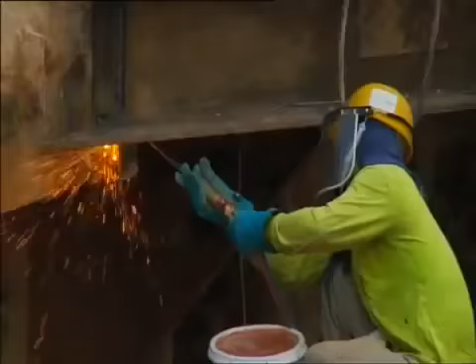Singapore's Marina Bay Sands is one of the world's most complicated construction projects. Engineers have to build not one, but three skyscrapers that will shoulder a sky park as big as an aircraft carrier. Worst case scenario, we get stuck. They have to devise ingenious solutions to assemble a 60-metre tall museum of impractical dimensions, install giant artworks, and erect seemingly floating pavilions for shopping and entertainment. If engineers succeed, they will create a virtual city unto itself.

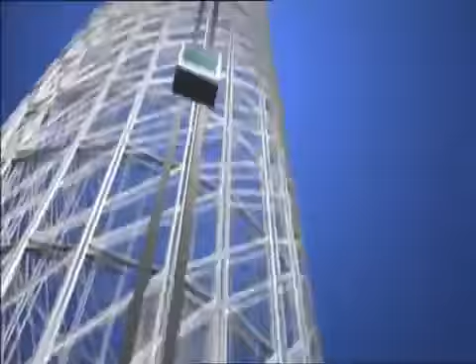Singapore, the Southeast Asian country, is smaller than New York City. The lack of space forces it to build its largest leisure and entertainment hub to date on a small tract of reclaimed waterfront land. The Marina Bay Sands: it's not one megastructure, but many.

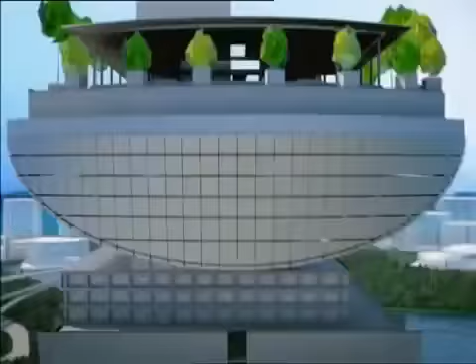Serious challenges lie in the array of buildings that form the unique complex. Three 57-story hotel towers slope at such great angles, they're in danger of buckling under their own weight. An even bigger problem is the hotel's roof. A 340-metre sky park spans its length, containing gardens, outdoor pools, and the world's largest cantilevered observation deck. But how do you build something as big as an aircraft carrier, 200 meters in the air?

In the hotel's atrium, mammoth works of art have to be somehow incorporated into the architecture. Its challenging centerpiece: a 15-ton mass of steel by a renegade artist from Britain.

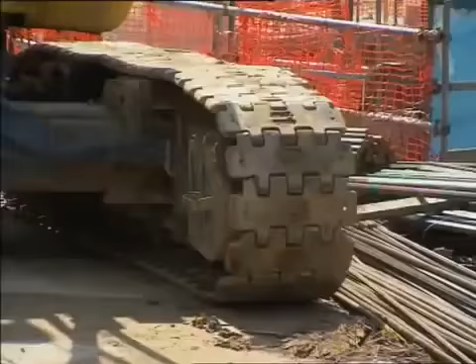A 60-metre tall art science museum is designed for maximum visual impact. It will be to Singapore what the Opera House is to Sydney. Only one problem: it seems too impractical to construct.

And a set of dramatic glass-encased pavilions, while themselves pose little challenge, have to be built in water.

The man behind the Marina Bay project understands the risks, but he believes that anything short of astounding will fail. Sheldon Adelson, one of the world's richest men and CEO of Las Vegas Sands Corporation: 'What we hope to accomplish is to change the face of Singapore tourism. So we expect a very successful development.'

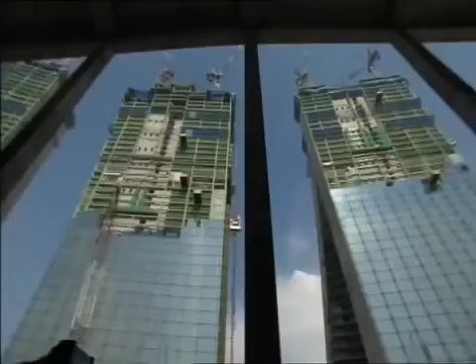'That is by far the largest and most expensive single project we've ever undertaken. It'll cost about 5 to 5.5 billion US dollars. It's a lot of money. Now, I know $1 billion doesn't buy what it used to, but by any measurement, it's a lot of money today.'

Adelson believes his huge investment is safe in the hands of Moshe Safdie, a world-renowned architect. Safdie is recognized for his use of dramatic curves and geometric patterns. The Marina Bay complex will be his largest and most difficult project yet.

'I think that architecture has to be timeless. Therefore, what it espouses, what it provides, needs to be something that has a long life. What's unique about Marina Bay is all the pieces coming together. You can't think about it as individual buildings. You've got to think about it as a piece of city. It's much more a symphony than it is a sonata.'

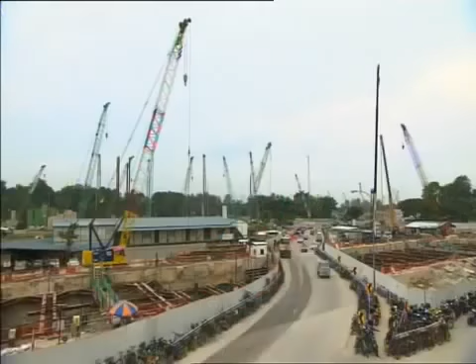On the ground, engineers are more concerned about the reality of building Safdie's vision. This is the North Retail section area. 30-year veteran John Downs is in charge of overseeing the entire project. 'The design is very, very diverse, and each component of the project is totally different from the others.'

'For a project of this size, you'd expect with the planning, with the design, with the construction, you'd be expecting somewhere between 6 to 7 years. Here is basically a 3-year turnaround.'

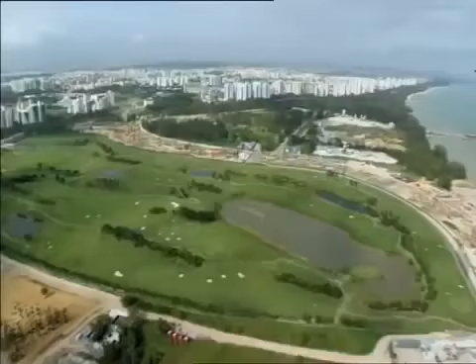The complex sits on 560,000 square meters of reclaimed land, part of a decade-long plan to revamp Marina Bay, a former saltwater estuary that's now a freshwater reservoir.

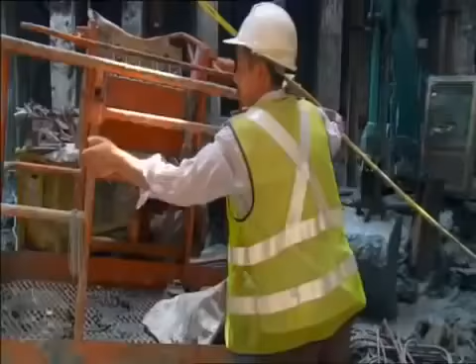Beneath the reclaimed land, which is essentially a seabed, is a dangerous layer of marine clay. Sometimes called black toothpaste, marine clay has very poor structural properties. If not given complete respect, the unstable marine clay is potentially fatal.

In 2004, Singaporeans discovered the lethal consequences firsthand. A routine excavation in an underground tunnel for the mass rapid transit network causes a collapse, creating a gaping hole in the Nicoll Highway, killing 4 workers.

'The ground conditions in which they were building the Nicoll Highway were not dissimilar to those in which we are encountering here. They had also soft clay, they had similar depths of excavation between 20 and 37 meters. One of the big things that was learnt in the Nicoll Highway collapse was the importance of monitoring movements and the control of quality as the construction proceeds.'

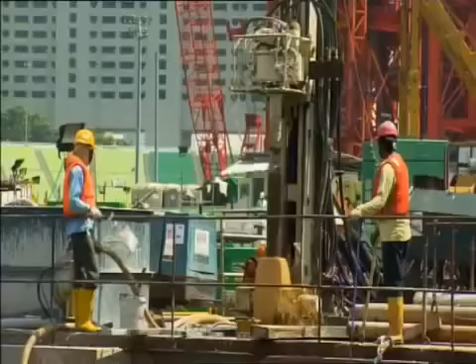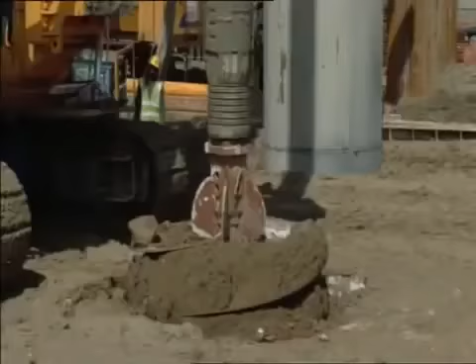Marine clay is an old foe of engineer Mike Barton. He's defeated it in the past by understanding how it behaves. 'The big problem with marine clay is that it is so soft that when you dig out the inside, the walls will move and potentially collapse and allow all the surrounding water in the bay into the excavation.' So, before work can begin, the unstable building site needs major fortification.

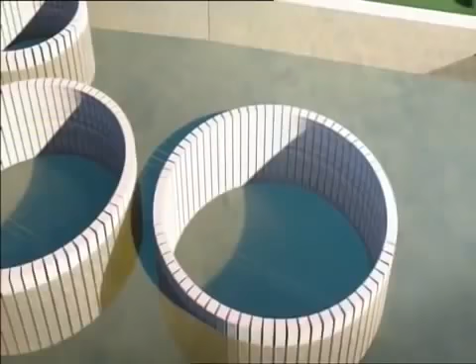To combat marine clay, engineers decide to build giant concrete walls to create stabilizing perimeters for the larger buildings, known as diaphragm walls. Up to 1.5 meters thick, diaphragm walls are steel-reinforced concrete sections, pounded 50 meters into the ground. They form watertight enclosures for men and machines to work round the clock.

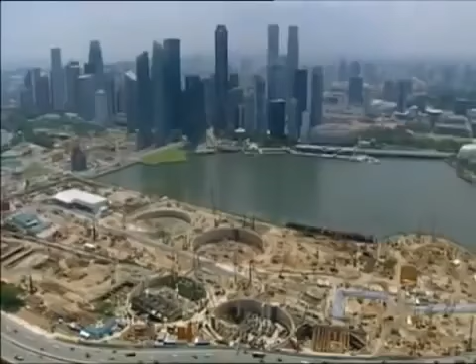In just 1 year, over 4,000 meters of diaphragm walls help produce a rock-solid foundation. The diaphragm walls were constructed in a formation we called a peanut formation, which is 2 circles joined together, and a donut formation, which is circular. They're able to withstand very large forces from the marine clay without any movement. They encapsulate an area bigger than a football pitch that enables us to excavate very quickly and build structure up very quickly.

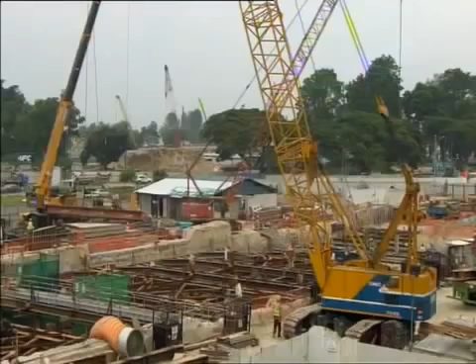Securing the footprint of the Marina Bay project has already taken a year out of John Downes' schedule. He now faces the difficult task of erecting the resort's many buildings in a space of just 2 years. Just managing the whole logistics of that, including the construction methodology, is very, very challenging for us.

To meet his tight deadline, Downes chooses the most direct solution. He hires 16,500 workers to construct every single building simultaneously. It's like leading a small army, so organizational excellence is key.

We're just on the edge of Singapore in the CBD here. Rather than lose the contractors and the workforce to go off-site, we built our own 3-story project office. We have all of our contractors, our subcontractors here. We house our resident site staff. We have our project management team, our construction management team, our design management team, and the logistics here.

Come lunchtime, the monster workforce creates another massive challenge for Downes. He responds by building one of the world's largest site canteens. We've got 13, 14 different food styles here.

You can see by my shape and size that I eat here every day. I enjoy this food. So here you can see the project bakery. It has its own ovens, it's set up for breakfast. We cater for sandwiches during the course of the day. Can I take a sausage roll, please? So, freshly cooked food, straight from the oven. We stand by our products.

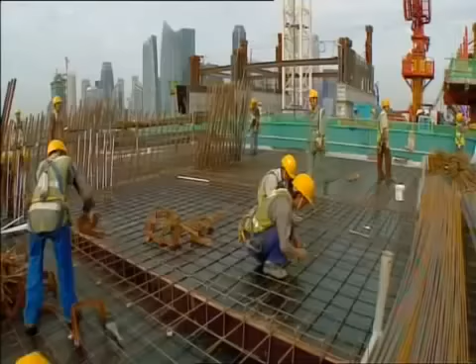The tight schedule also creates problems at the hotel towers, where engineers are already struggling with a congested site. The important thing to do is to make sure that they come in and deliver the goods straight away and then get out again. We don't want too many vehicles on site at the same time.

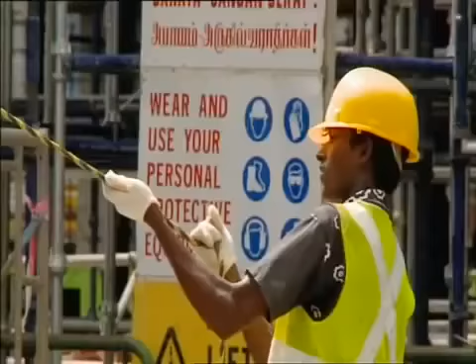To speed up construction and alleviate traffic congestion, engineers turn to a method that's proven itself countless times in the field: in situ concrete casting. Hotel walls are made on site in the thousands. Workers laying the floors are so proficient, they produce 1 floor per 4-day cycle.

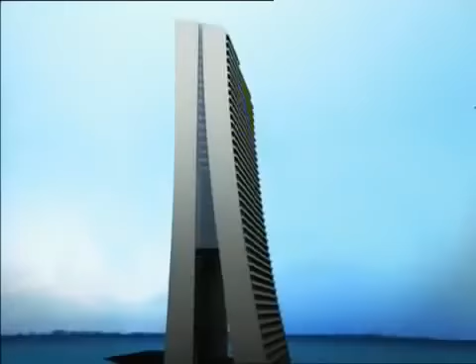It's an impressive display for a conventional solution, but the structure they're attempting is anything but conventional. The key challenge of building the hotel towers is its unusual design. Unlike other skyscrapers, part of the towers slope at incredible inclines. Like a set of collapsing dominoes, the towers could buckle under their own weight if a practical building solution is not found.

It's a major concern for engineer Craig Glover. I've been in the industry for 25 years, done a wide range of projects in many different countries, but nothing compares to this whatsoever. There was nothing we could take reference from across the street on the next high rise or across town. This is a new frontier.

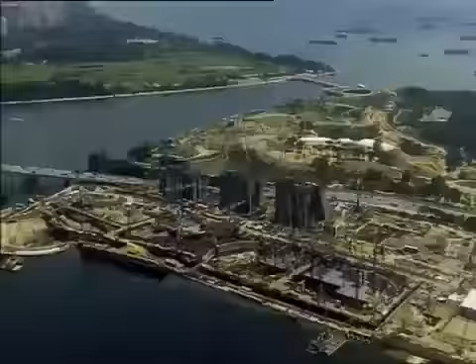Costing a staggering $5.5 billion to build, the Marina Bay Sands could be one of the world's most expensive mistakes if engineers can't solve the tower's problematic structure.

Engineer V.C. Cheong leads the design team, and their solution comes out of left field. If you look at the configuration, it's not a straight tower, it's with a sloping leg. So all this sloping leg actually is, inducing a very huge external force onto the structure. We kind of built it without any support, so we actually formulate a solution to prop up the sloping edge.

Using a technique they've never employed before, engineers build large temporary struts made of strong structural steel. They prop up the sloping towers as they rise. Like a suspension bridge, high tensile steel tendons, also known as tension cables, give an added layer of support inside the walls. In theory, both the struts and the tension cables are temporary and will be removed once giant link trusses connect the towers at the 23rd floor.

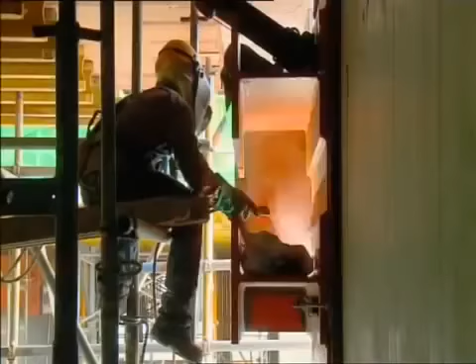The sheer weight in concrete is enough to topple the towers at level 8 if the engineer's calculations are wrong. To reduce the chances of failure, Glover and his team make a radical decision.

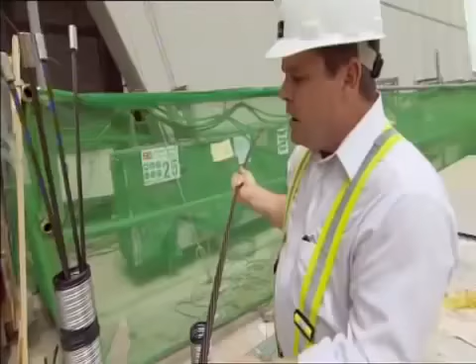Instead of removing the temporary tension cables in the tower walls, they make them permanent supports. I feel good it's in there because it's added strength, it's added support. We have a twined network here of high-strength steel, and what we do is we bundle these up so they form a cord with multiple strands inside this conduit.

We place this conduit inside the walls prior to casting the concrete. Once the concrete is cast, we anchor one end into the concrete. So we then put a very high-strength hydraulic jack onto the collar and one by one pull these strands through and tension them up. What that does is basically pull the building back and hold it in place.

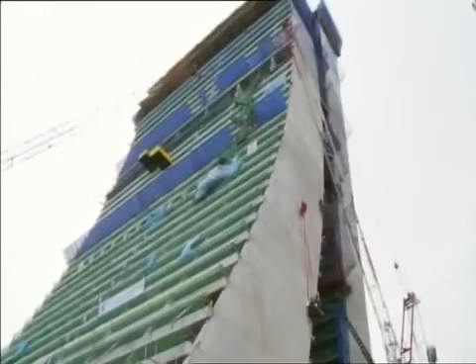If these cables were to suddenly break or if they weren't in place, we wouldn't be able to control the self-weight as we build more and more of the building up. So it's a very important part of the actual engineering of the solution to hold the building in place until we can connect it.

Despite the team's quick thinking, the true test of their engineering decisions will only happen once the main support struts are removed and the massive link trusses installed. Link trusses are huge reinforced steel brackets that bind the towers at the 23rd floor.

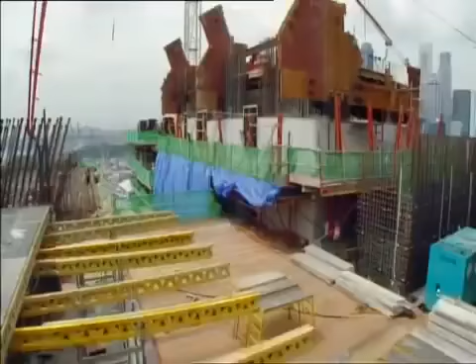Once their installation is complete, they transfer the sloping tower's weight completely away from its temporary struts. Once we're satisfied that we don't have any stability issues, then we can bring the large hydraulic cranes in and member by member start to dismantle the struts.

We've got a lot of time pressure, so we've just got to make sure that these things keep moving. It's done its job holding up the building, now it's holding up the job.

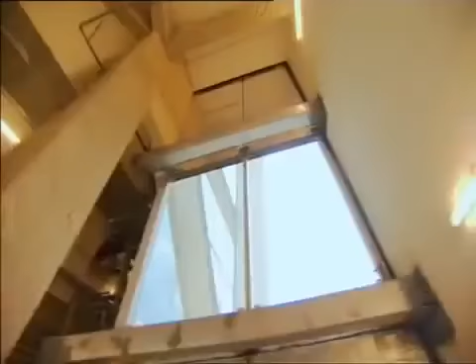As the last pieces of support struts leave the site, Glover and his team can finally breathe a sigh of relief. The link trusses are holding the building load.

So far, so good. It's a lot of theory, a lot of calculations, but until you really do it and really get it out of the building, you never quite know. I'm always waiting for the phone to call in the middle of the night that we've got something's gone wrong.

Not all the structures have ended up according to plan. The 60-meter-high Art Science Museum is facing a major design overhaul. Planned as a venue for blockbuster exhibitions on the arts and sciences, its bowl-shaped roof doubles as a 3,000-seat amphitheater.

Unfortunately for engineers eager to start its construction, architect Moshe Safdie isn't happy with its current shape. Somebody looked at them and said, looks like a bunch of bananas. In fact, Mr. Adelson said, looks like a bunch of bananas. I said, well, if they look like a bunch of bananas, we're not there yet.

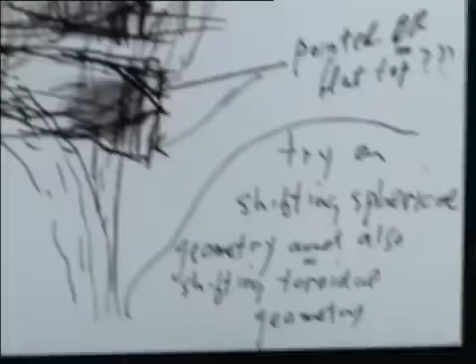It's terrible news for Safdie's design team, especially its principal, Gene Dyer. There are times that Moshe will come in with an idea. We think it's quite exciting. We'll pursue the idea for weeks or even months. He'll come back and say, I want to change the idea. And we've already bought into the idea, so it's a bit frustrating.

To rework the unique geometry and dimensions of the Art Science Museum, Dyer and his team turned to advanced 3D modeling programs. It not only makes navigating the museum's complex geometric patterns easier, it shortens the process to a matter of days. The model is dynamic and it can be moved by just changing one or two elements.

Moshe could experiment. He could make rapid judgments in a very short period of time about which way he wanted to take the project. This is a process that was impossible to do 10 years ago. Without the computer, this would take years and years and years.

The nautilus form effectively became the shape. To rationalize the new look into a buildable structure, architect David Robbins splits the museum into spheroid segments. We began to look at using different spheroids to define the different upper and lower surfaces of this building. That gave us a very rational way of describing the plan form to our clients.

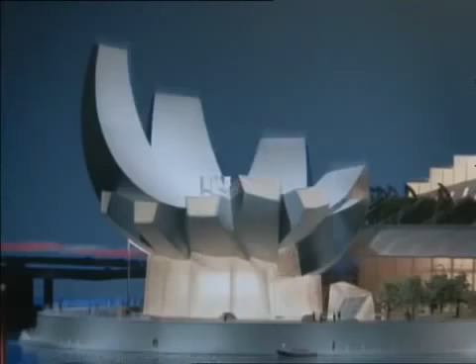After months of refining the design, Safdie is finally happy with the result. The mathematical precision that we gave them made them even more beautiful.

It led some people to say, well, hand of welcome. Others said, is that a lotus? And the more ambiguous the associations, the closer I thought we were getting to our target. Because I think the least exciting buildings are those which have overt symbolic associations.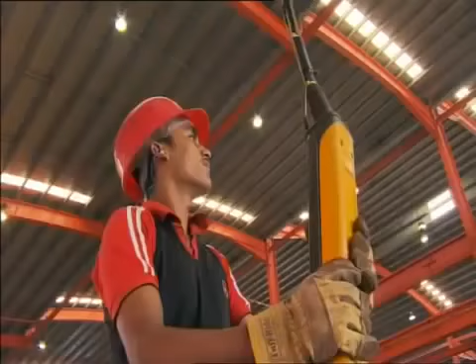Armed with the new design, engineers begin work on the museum's 60-meter-high superstructure. A staggering 5,600 steel elements, weighing some 5,200 tons, are prefabricated to exact specifications.

They are then trucked onto site and assembled. It's like putting together a giant jigsaw puzzle. Each element has to be installed with pinpoint accuracy. If it's even a few millimeters off, engineers will have to start from scratch.

Engineers of the massive atrium at the base of the towers are facing an equally tough construction process.

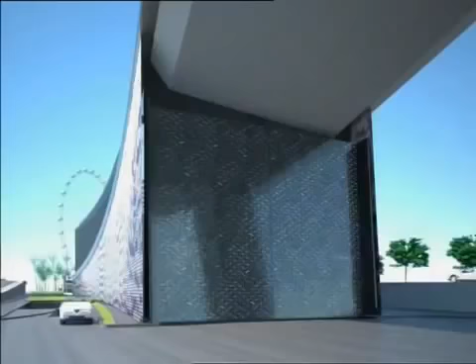Safdie has come up with a challenging design. He wants to inject art into the atrium's architecture, so that visitors will feel like they're walking through a grand Gothic cathedral.

In medieval times, if you think of a Gothic cathedral, there's the architecture, there's the stained glass windows, there's the sculptures on the pinnacles. You cannot draw a line and say art and architecture. Art and architecture are one, they're singular experiences. And I think what we try to do here is come back to this integrative mode.

To create the centerpiece of his vision for the atrium, Safdie commissions renowned British sculptor Antony Gormley. Famous for his unusual approach to art, Gormley is the brains behind the Angel of the North sculpture in northern England.

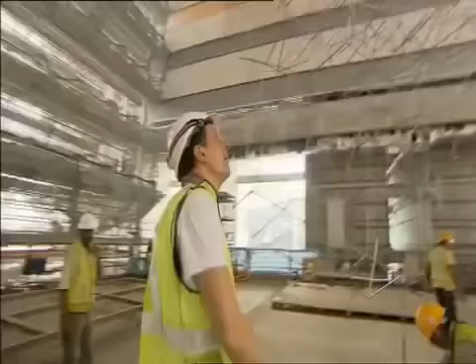What he's about to attempt is proving to be more of a construction challenge than an artistic one. A cloud-like sculpture some 40 meters long, made up of 15 tons of high-grade stainless steel, hung 12 stories above the atrium.

The Angel of the North is, in a way, making a very traditional public sculpture because it's isolated in space at the edge of a valley. You can see it for miles and miles. It's very much about occupying space. This is about activating space. You can't see it for miles and miles. You have to be in the space with it.

Each viewer, every person coming out of their hotel room will confront this big chaos thing and have to find their place in it. I think that's an exciting thing.

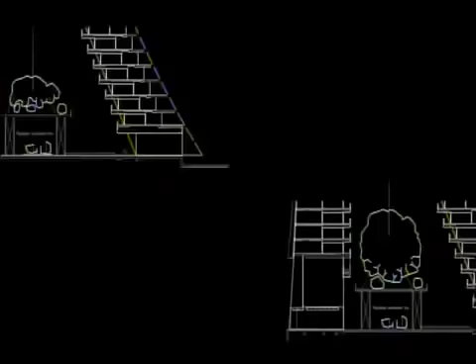Called drift, Gormley's steel sculpture is so huge and so complex that it can't be sculpted using traditional methods. Gormley's team has to create state-of-the-art 3D computer programs that translate his ideas into buildable plans.

But just as they're about to begin construction, a bombshell drops. September 2008, a global financial crisis wreaks havoc on markets. The flow of the hundreds of millions of dollars that keep the Marina Bay project going every month suddenly stops.

For engineer Matthew Pryor, it's a massive blow. I feel devastated. It couldn't be worse. Probably the worst day of my life professionally.

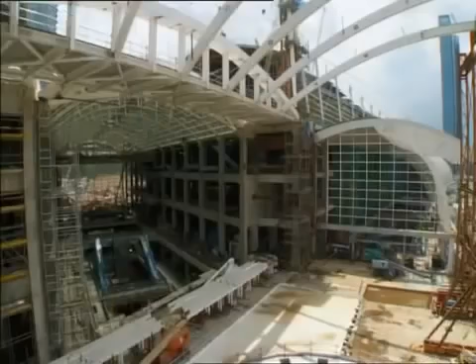There's no more money coming through. So unless we put some funding in place or there's something, we're going to have to shut the jobs down. But there's a tough decision to be made, and we don't know what we're going to do just at this point in time.

With the future of the multi-billion-dollar project plunged into doubt, all eyes turn to the man behind it, Sheldon Adelson. The next move of one of the world's richest men will determine the fate of the mega construction site.

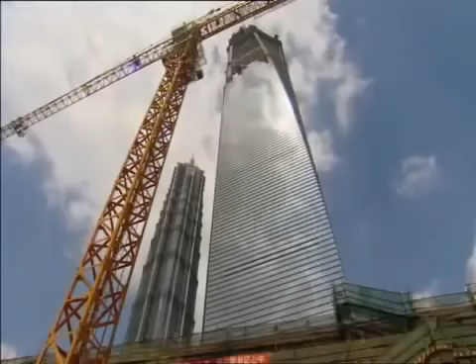The 2008 global financial meltdown is a haunting echo of the 1990s Asian crisis. Back then, progress on Shanghai's World Financial Center came to a complete halt for 5 years. For Adelson, that's simply not an option for the high-profile Marina Bay resort. His vision of changing the face of Singapore tourism is at stake, and so are billions of dollars of investment from his Las Vegas Sands Corporation.

He prefers finding a stopgap solution to weather the storm. Throughout history, there has never been a trend that went straight up, nor a trend that went straight down. So it goes up and down. It's only a matter of time when things will recover.

In a bold move, Adelson pledges his vast personal wealth to the completion of the project, effectively ending any speculation of failure. There's a massive sense of relief in the company. Everyone's pleasantly surprised how quickly we've got through this and the fact we could hold it together and get it going again. So euphoria is probably the best way to describe it.

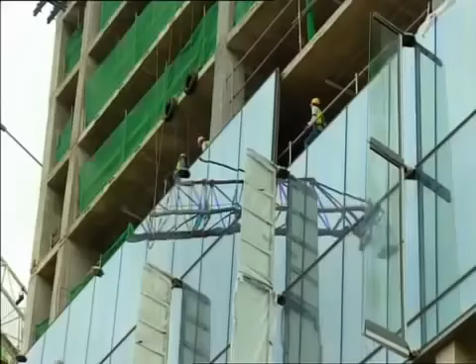With the crisis averted, construction on the three 57-story hotel towers, the casino, theatres and convention centre resumes at pace. Everywhere you turn, steel is being installed. It's vital reinforcement for every concrete structure on the 15.5-hectare site.

For one project at the tower's atrium, steel is more than just reinforcement. To construct the 15-ton drift sculpture by British artist Antony Gormley, engineers had to first laboriously prefabricate it into over 70 segments. The segments are then welded into 8 slices and will ultimately form the sculpture.

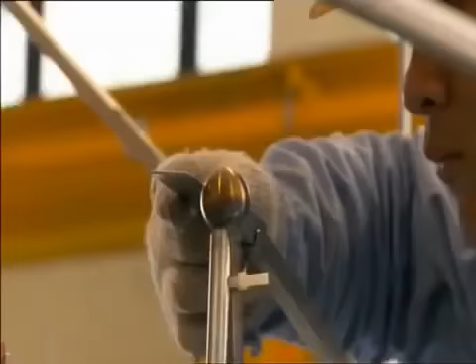It's a tricky operation, but engineers are able to complete it swiftly due to a system of codes and numbers that enable them to quickly identify what goes where.

Once all 8 slices of drift are fully assembled, it's lifted up into position by a temporary lifting frame. A massive box truss on the atrium ceiling then takes over the load. In theory, the box truss will support the weight of the lifting frame as it's being lowered down.

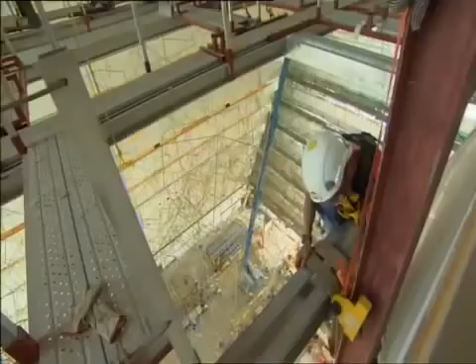It will be a heart-stopping moment, especially for engineer Graham Stevenson. The lifting frame is about 9.5 tons, so when it picks up and gets some momentum, there's a potential that it just wants to flick over and rotate through its full 90 degrees, and we won't have it under control.

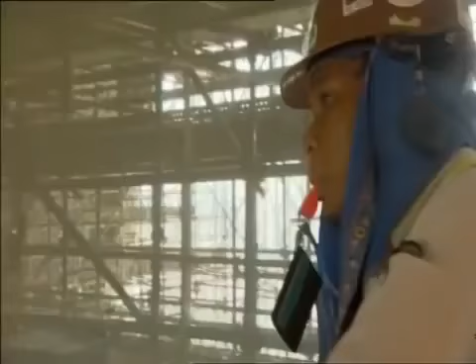Stevenson's solution: four powerful automated hoisting drums located at the four corners of the frame allow workers to control the strength and speed of the operation with high tensile steel cables. A spotter at the top determines the pace of the procedure and marshals the team.

With their preparations complete, it's time to face the moment of truth. Sculptor Antony Gormley is as anxious as any of the team. The entire operation is estimated to take up to 10 hours to complete. As soon as the frame is in motion, there's no turning back.

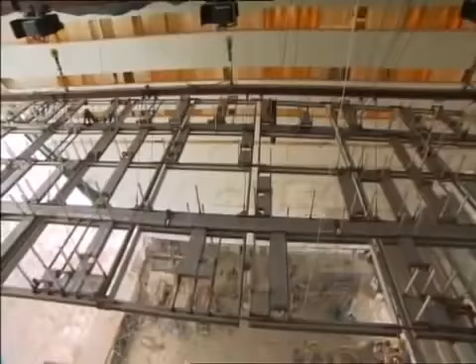Midway through the lift, Stevenson receives reports of a potential problem. 22 story, number 7 temporary cable, scaffolding touching the cable. Why you got the temporary cable touching to the transverse? Yeah, but is it just the end of a tube? Yeah. So you can just cut the tube? Yeah.

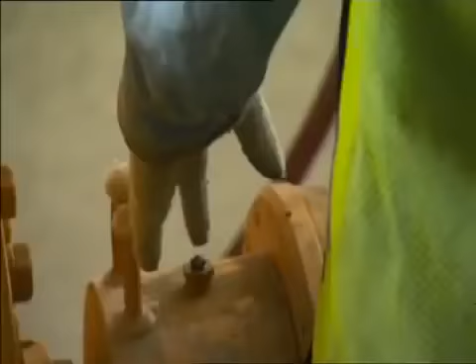Problem solved. But what was previously an estimated 10-hour procedure now turns out to be a 24-hour marathon lift. At 6 a.m. the following morning, they complete the job.

Absolutely fantastic. The Gormley is now finally in its final position, so really an end of a long and exhausting day, and big thanks to everybody, but it's finally done.

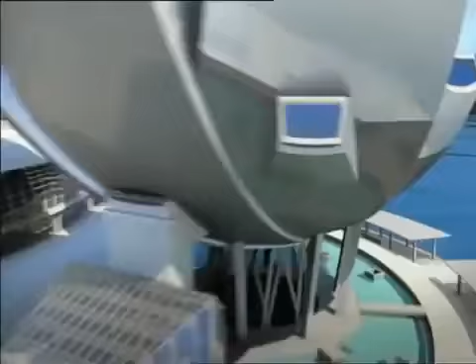While the drift settles into its new home at the hotel atrium, elsewhere attention is focused on one of the project's key features, the Crystal Pavilions. The two glass-encased buildings by the promenade are set to be the resort's premier shopping and entertainment complexes.

But before engineers can make them a reality, they have to secure their footprint, and already a major obstacle threatens to sink their objective. The Crystal Pavilions are situated within the confines of Marina Bay, so to found it, engineers have to find a way to build in 6 meters of water.

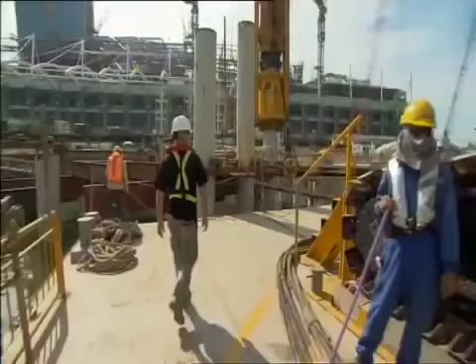The responsibility of tackling the problem falls on the shoulders of engineer Kurt Vella. I'm from Sydney. The underlying foundation in Sydney is sandstone, it's rock. All you need to do is just dust off the surface and you can build skyscrapers on it. Here it's very different. All the structures have to be heavily founded.

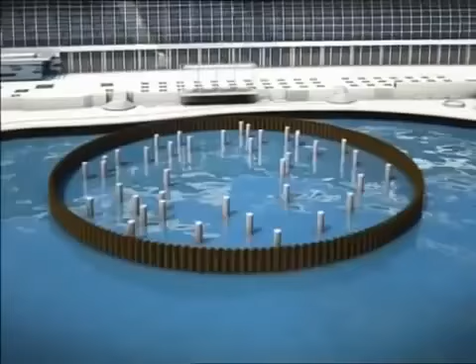To keep water out of the construction site, only one solution seems viable for Vella and his team: a waterproof steel structure called a cofferdam. This temporary formation surrounds the worksite with a circle of steel sheet piles, creating an impenetrable shield that locks out the water, keeping the workers safe within.

For the job, they rope in a 12-ton vibro hammer. It punches the sheet piles deep into the earth, making the cofferdam rock solid and resistant to movement.

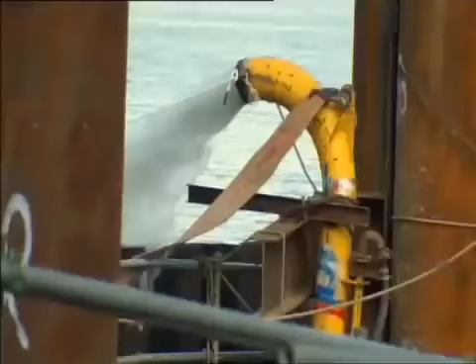With the cofferdam secured, engineers deploy powerful diesel pumps and run them 24 hours a day, ejecting any water that remains within the walls.

This last step comes with inherent dangers. The force of the water outside creates what engineers call hydrostatic pressure. In theory, it's powerful enough to force water through any gaps in the cofferdam.

It's something that Vella prays will not happen. There's a bit of hesitancy and concern because we've got to build this building in the middle of Marina Bay. Everybody can see what we're doing, so if it leaks, it's a problem. If it fails, if it moves, if it collapses, it'll be an absolute catastrophe.

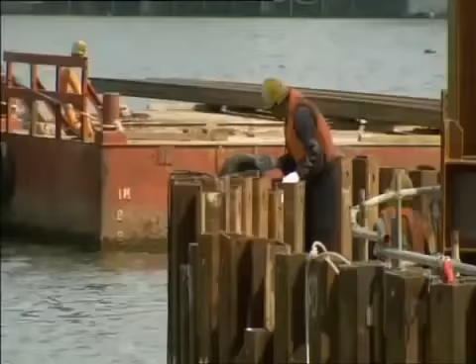After a day of pumping, Vella's worst fear comes true. Parts of the cofferdam are leaking.

To rectify the problem, Vella orders a team of 8 divers into the water on 10-hour shifts. Their mission: find out where the water is being forced in and plug them shut with epoxy resin.

Anson Lee is an 8-year diving veteran. The toughest part of my job is the environment. The visibility is poor here, it's totally zero, I cannot see anything below. I solve that by feeling the suction and then feeling out the thing. You have to overcome all the fear that you can't see under the water, but okay lah. I feel proud to be one of this team to build this thing out.

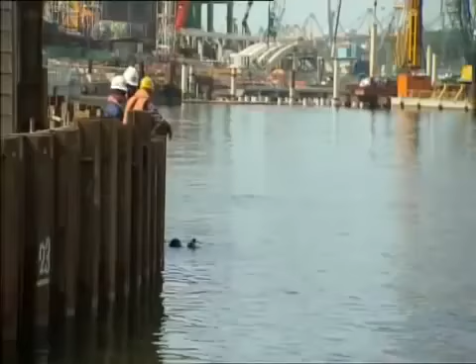After 2 weeks of hard work by divers and the pump crew, the job is finally complete. Kurt Vella can also breathe easy.

Every job is different, every job has its challenges. You plan and prepare, you try and identify your risks in advance, and you try and come up with contingency plans. And that's what's really enjoyable from my perspective. That's what gets me out of bed in the morning.

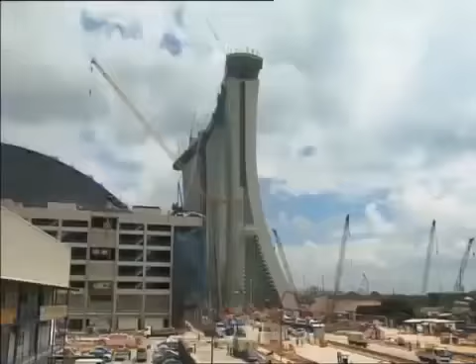After 2 years of battling the elements and overcoming difficult construction milestones, the 3 sloping towers of Marina Bay Sands can finally celebrate their topping off ceremony and move on to the next phase.

But a destructive force of nature threatens to throw a spanner in the works. With climate change predicted to affect the pattern of Southeast Asia's typhoons, Singapore may one day experience the destructive tropical storms plaguing its northern neighbors in the Philippines and Taiwan.

When that happens, typhoon-force winds could spell disaster for the hotel towers, especially the 340-meter sky park sitting on top of it. The force of the wind can make both buildings sway dangerously, causing irreparable damage to the structures.

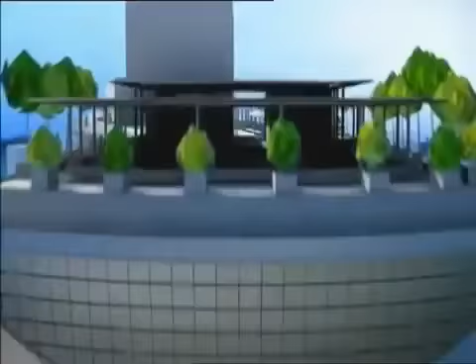The Sky Park, offering 360-degree views of Singapore. The visionary design will have enough surface area to park 4.5 Airbus A380s.

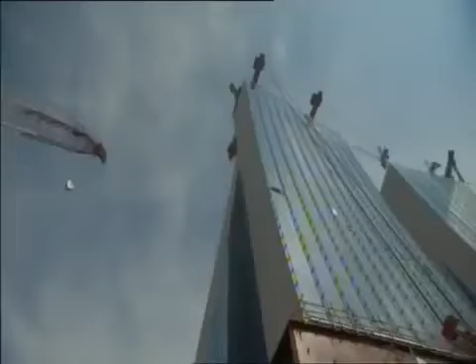Safdie's revolutionary idea scores points for ingenuity, but it clearly isn't what nature intended. Typhoon-force winds threaten to rock the towers and its sky park, causing unimaginable damage. If engineers are to make the building a reality, they'll need a rock-solid solution.

Still got to do all the cladding, but yeah.

Engineer Tony McKee has little time to make things happen. At the moment, we're running a couple of weeks behind what we'd originally planned. We're not entirely happy about it, but at the end of the day, we've got to do this safe and we've got to do it properly.

To fight the enemy, McKee knows he has to first understand the enemy. He hires leading US wind engineers CPP to carry out extensive testing on the towers and sky park. Their mission? Find out how Singapore's potential wind forces affect the buildings.

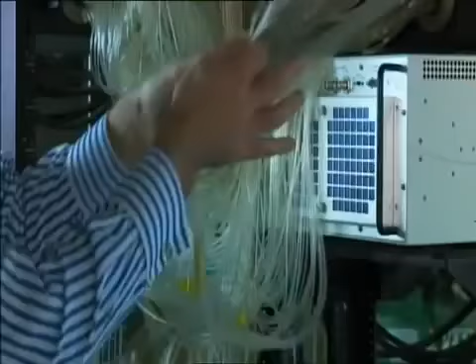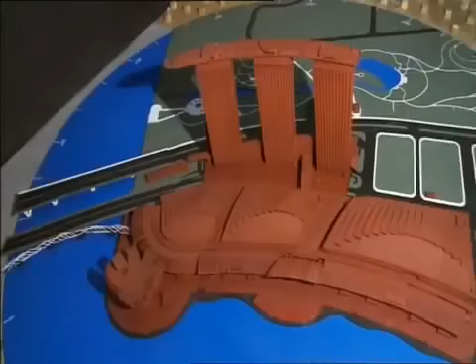We turned that upside down. Wind engineer Roy Denoon oversees the process at their state-of-the-art wind tunnel in Fort Collins, Colorado. The thing that makes this really special is the fact that we have this sky park running across the top, linking all the towers together. So whereas normally with a normal tower, we'd measure the loads on the tower in isolation, with this one, what we're needing to do is to measure the loads on all 3 of the towers at exactly the same time. So that way we can know how the towers are going to move relative to each other, so we can make sure that they're not going to put excessive strains or movements into the sky park.

During the tests, a scale model of the Marina Bay Towers is blasted with 40-kilometer-per-hour winds to simulate faster typhoon winds in reality. Over 1,000 pressure-measuring instruments inside the model register how the winds affect the buildings. At the end of the tests, engineers confirm that the 3 towers can deform by some 200 millimeters during the fiercest storm.

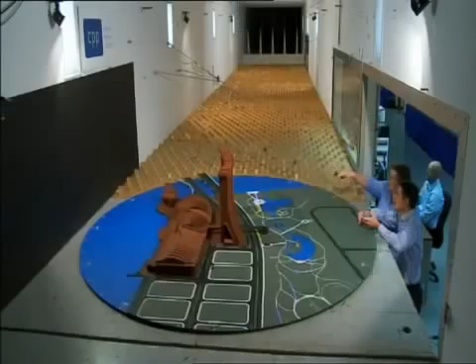Engineers quickly figure out a solution: movement joints. Inspired by bridge engineering philosophy, movement joints are essentially gaps located between the concrete towers. The huge gaps allow for movements of up to 250 millimeters.

Aluminium and stainless steel plates act as sliding components. They can move back and forward over each other, a little bit like you'd see in a flexible bus, where you have that articulation happening in the middle. It's a similar concept to that.

To accommodate the differing movements of the three towers, engineers install multi-directional steel bearings below the sky park. The solution scores major points with Tony McKee. Only one problem: it won't work with a rigid structure containing 1.5 million litres of water.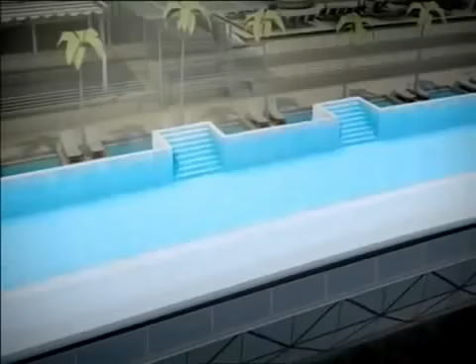Any movement in the joints could fracture the Sky Park swimming pool, endangering lives and property below. With the help of US pool builders Natare, McKee quickly develops a solution, but it's completely unproven: a secondary system of movement joints built into the pool itself.

The plan: to split the pool into 3 smaller 50-meter units. Steel top hats then conceal the gaps. Huge basins catch any runoff pushed up by the moving pools.

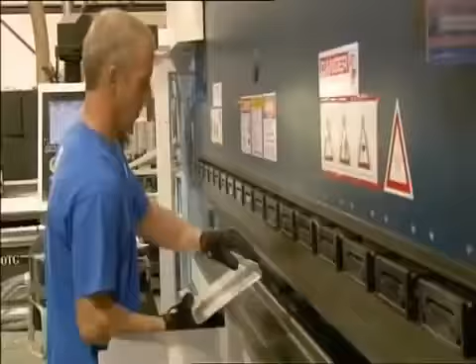McKee knows he only has one chance at making this work, so he commissions a trial by water. What we've got here is the side of the swimming pool, which replicates the movement that we're going to get between the towers. And what the Natare guys have come up with here is a simple track system which can be pushed back and forward by a forklift. And that replicates the full range of motion that we have on the swimming pools, which can be 0 to 250 millimeters either way.

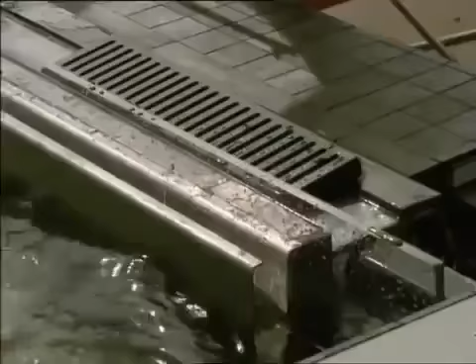It takes engineers weeks of testing before they're completely satisfied. Armed with the final results, McKee can now safely begin construction of the Sky Park.

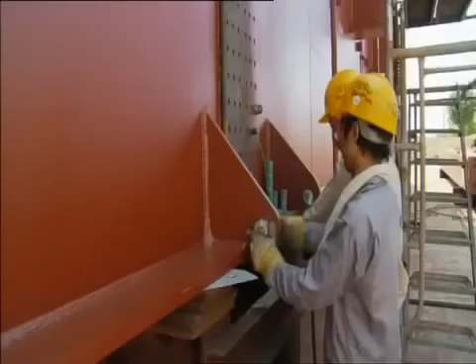Consisting of some 10,000 tons of steel, the Sky Park is as big as an aircraft carrier. The most practical way for engineers to construct it is to break it into 14 segments on the ground before assembling it at the top of the towers. There's no room for miscalculation at 200 meters in the air. Each segment is carefully prefabricated and tested by steel specialists Yongnam,

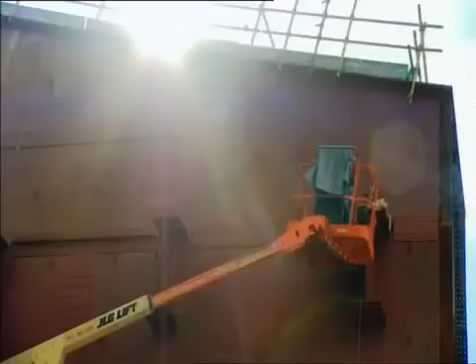From the very beginning, McKee and his team anticipate that their biggest challenge will be lifting the 2 largest segments of the Sky Park, the box girders. Measuring 80 meters long, their combined weight is a staggering 1,400 tons. How do we feel? A little bit of apprehension. You know, it's a significant lift that hasn't been done before. If something goes wrong, it could be really significant for us.

To reduce risks, McKee turns once again to proven bridge building technology. In a process known as strand jacking, giant temporary lifting gantries made of strong structural steel will use powerful hydraulic jacks to lift the box girders up to the top of the towers before sliding them into place. It will be the longest and largest lift of its kind in the world, and McKee needs the best in the business. He puts a pioneer in the field in charge: Swiss-French company VSL.

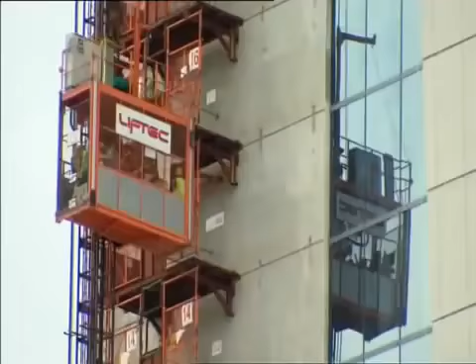Engineer Eddie King and his team have successfully raised bridges, stadium roofs, and even Ferris wheels. The toughest part of my work is you have to plan everything very precisely, because everything is set up in millimeters. We have to lift it up and slide it in and position it to 5 or 10 millimeter accuracy. If we don't do it properly or safely, the biggest hazard is the thing can fall down to the ground.

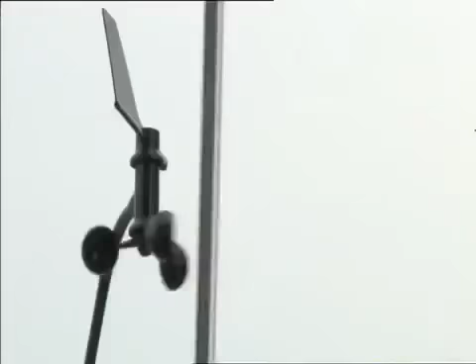Other factors further complicate the lifting process. Due to an increasingly tight schedule, the team is forced to conduct the lift during Singapore's annual monsoon season. It's almost impossible to predict when a tropical storm will hit. When it does, the accompanying lightning strikes can endanger lives. And because the whole operation takes place meters from a jam-packed highway, curious onlookers will be able to see any mistakes the engineers make. It's a potential public relations nightmare.

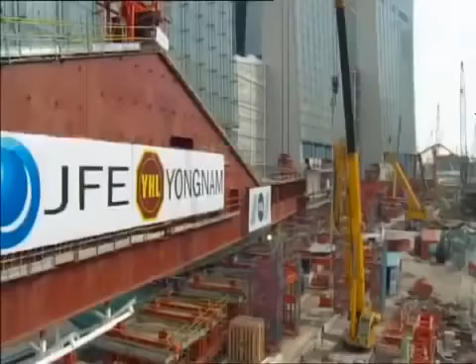Worst case scenario, we get stuck, and then we've got to figure out how to release it, how to continue lifting, because basically once we get going, we keep going. Okay, people, okay? Okay, now I stop, huh?

During an estimated 16-hour lift, the box girders will move at a cautious 14 meters per hour. Eddie King and his team constantly check their weather gauges for any incoming storms. The hydraulic jacks are also inspected regularly for overheating. No one wants the operation to stall in mid-air.

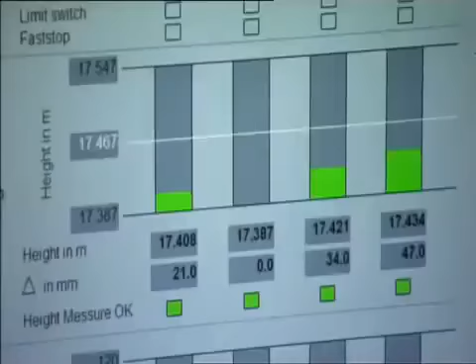Today, 0.1 to 0.4, 288. Oh, that one, this one. Change to channel 2, yeah?

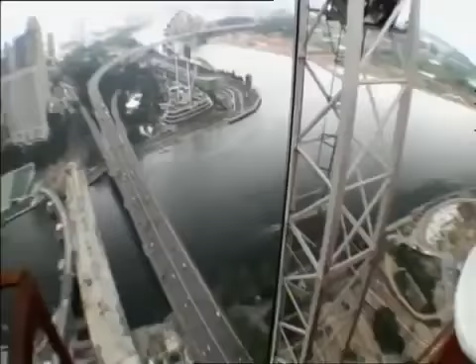Despite the team's best efforts, Mother Nature catches them by surprise. Okay guys, rain is coming, it's better we stop here. An approaching downpour threatens to grow into a lightning storm. We are at 200 meters above and the surrounding buildings are quite far away, so there's a chance of lightning striking on the high point like this. So we've got to stop and wait until the weather gets better before we continue our lift.

McKee's worst fear comes true. If the girders remain stuck at midway for too long, he will have to order them down. Okay.

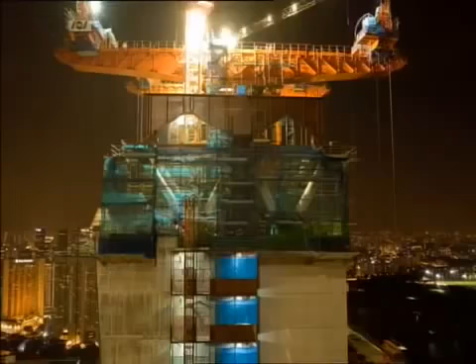After a tense 3 hours, the lightning threat passes, and the operation cranks back to life. By the time the box girders slide into position, it's past midnight. Everything went quite smooth today, so we hope tomorrow we can do the same, smoothly bring it in and roll transfer to the permanent position.

With the lessons learned from the box girder lift, the rest of the segments go up smoothly. As the final piece rises into place, Singapore is already marveling at the team effort behind one of the world's most ambitious building projects.

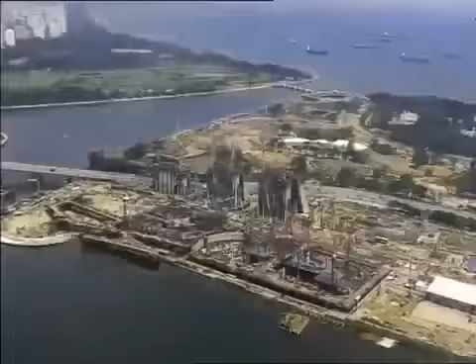In just 3 years, engineers overcame seemingly impossible construction challenges, defeated marine clay, engineered ingenious design solutions, and survived the most debilitating financial crisis since the 1930s. As the finishing touches are put on the resort, the stage is set for an opening party, Singapore style.

Those involved reflect on the project that has already far surpassed their expectations. It's a bit overwhelming, you know. I'm in the process of disconnecting the umbilical cord, it's not easy for an architect. This type of project probably only comes around every 25 years or so, so it's been a lot of hard work, extremely challenging. I really can't imagine, I couldn't list the number of challenges we've overcome along the way to get to today. Everybody is saying this is kind of a miracle, you know, never seen anything like it. And it's rewarding, it's nice.

The Marina Bay Sands, Singapore. Proof that with visionary design and engineering know-how, megastructures can still defy the odds and fulfill the wildest dreams.